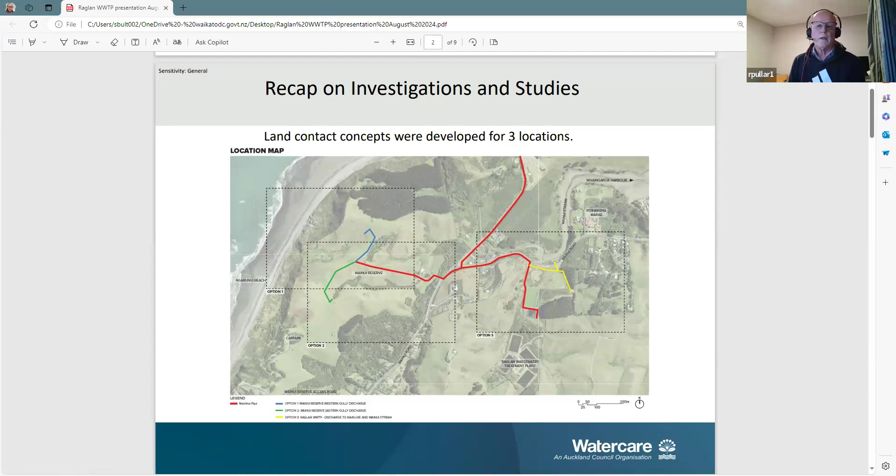We'll show you the preferred option shortly. We looked at another option which was reusing and creating a wetland within the plant area. That was option 3 down there where that yellow line is. So the preferred option, if we could go to the next slide, is option 1, and we've worked away on that, and this is the point where I hand over to Steph and she'll talk you through. Okay, Steph?

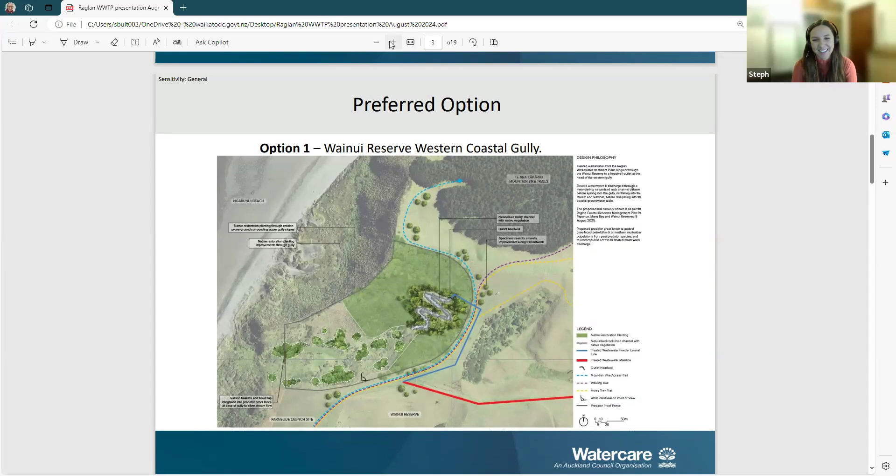Awesome, thanks Richard. So all options were taken through to Tainui with Angeline as the key rep there, and option 1 really came through in the feedback as the preferred option because it keeps any kind of discharge away from the Wainui stream. It provides that land contact as it goes through the naturalised rock channel, through the gully, and then eventually reaching the sand dunes and through to the groundwater of the marine environment. So if we just flick on to the next slide.

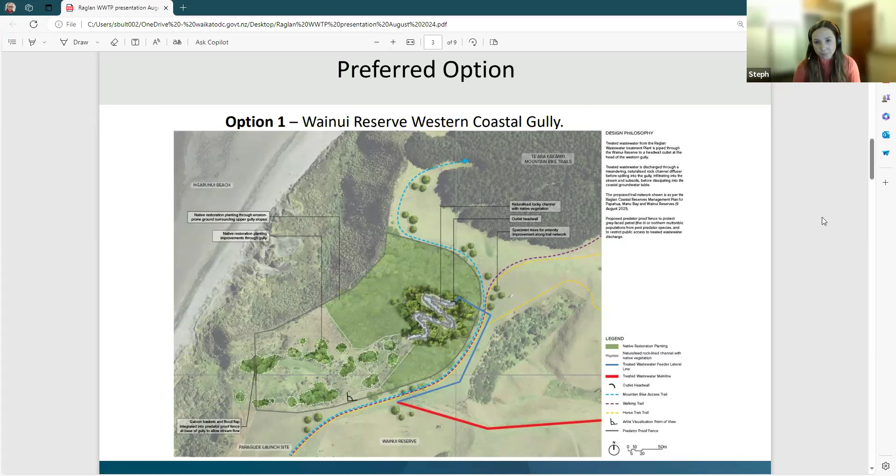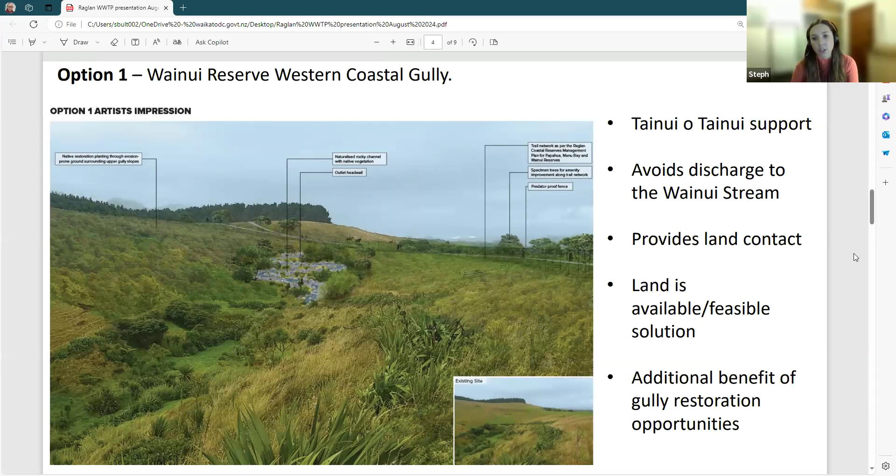Whilst none of the options that we've looked at are completely off the table, we have been focusing our energy on progressing option 1. Option 1 does have the support of Tainui. As I said, it avoids that discharge to the Wainui stream. It provides a long land contact, and it's feasible in the sense that the land is available. It's owned by Waikato District Council, and from a cost perspective, it's also feasible. We've run all 3 options through a cost estimate process.

We also think this site is really great for the opportunity to provide some restoration and enhancement of this whole gully area. Included in that cost estimate was about $1 million to regenerate the whole gully with native planting. So overall, it's looking like a really promising and feasible solution with some added benefits that we can incorporate as well.

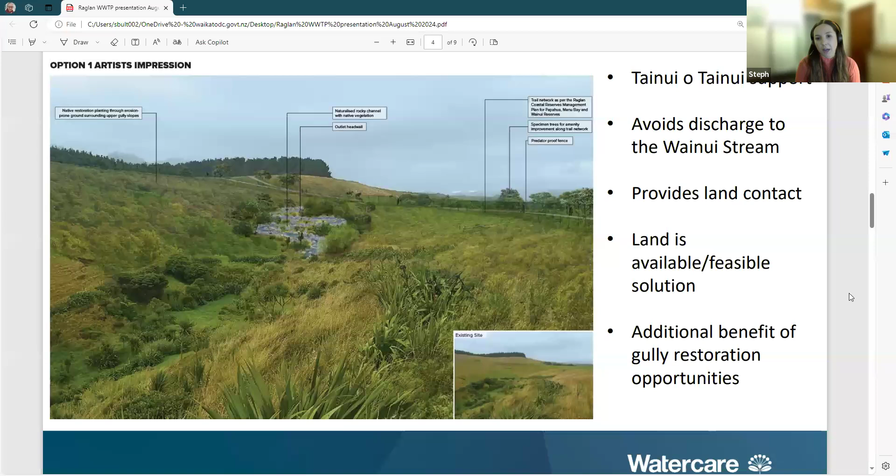So if we flick on to the next slide, one of the key things is working with our Waikato District Council Open Spaces team. So Steve Howard had previously done quite a lot of engagement with the Open Spaces team when they did look at SDI on the Wainui land.

So as a result of that previous engagement that Steve did, when they updated the Raglan Coastal Reserves Management Plan, it actually acknowledges that the Wainui Reserve may be used to look at for an alternative discharge solution for highly treated wastewater. So that's really helpful for us as a project in that there's been a warm up, it's been anticipated within the management plan, and this isn't a totally out of sequence option for it to happen at Wainui and at the reserve.

So we've taken the option 1 concept back to the open spaces team. So our main guy there is Glenn that we're dealing with. We talked him through the option and there was no major concerns or objections, and they're quite happy to work alongside our team as we progress through with design and our technical work. But of course, most importantly is that the reserves, we protect the recreational values and use of the reserve because that is its main purpose.

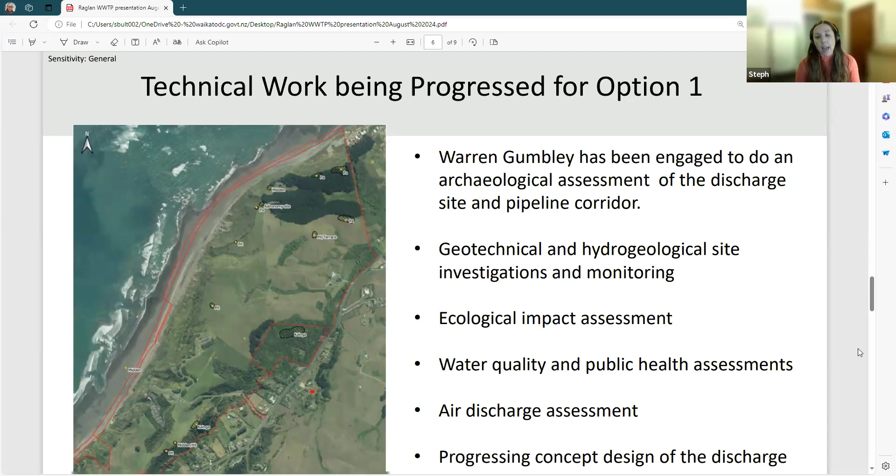Then if we flick on to the next slide, thank you. So we've got underway with engaging our technical assessments. So Warren Gumley has been engaged to do an archaeological assessment of the discharge site and also to look at the general corridor that we would need to do earthworks through Wainui to get the conveyance pipeline through. So Warren was recommended by Angeline as an archaeologist that's done a lot of work in this area already, and he actually did the assessment that fed into the updated coastal management plan. So he's really familiar with the sites. So Warren's heading out in the next couple of weeks to do an initial look over and make sure that in the general area there isn't anything that we need to progress further.

We're also getting our geotechnical and hydro work underway. So we're getting that done off the ranks first because we're looking at doing about 3 months of monitoring. So that's monitoring the groundwater within the area, just to see how the hydrology works through that discharge site. So we want to make sure that if we're sending water down there, that we're not going to get ponding and it's going to filter naturally, and that the site is going to be suitable.

We're also following that doing an ecological impact assessment, so that'll cover the gully but also the coastal marine area. Water quality and our public health assessments, air discharge. That's looking at the air discharge from the plant site itself, but also from the proposed discharge site. And then alongside our technical work, progressing with the concept design and then our ongoing engagement. So we do want to do quite soon a wider public engagement, so whether that's a drop-in session or something out in the community. Now that we have a solution and something that we're progressing with, we want to make sure that we're going out there and telling the story and getting some feedback.

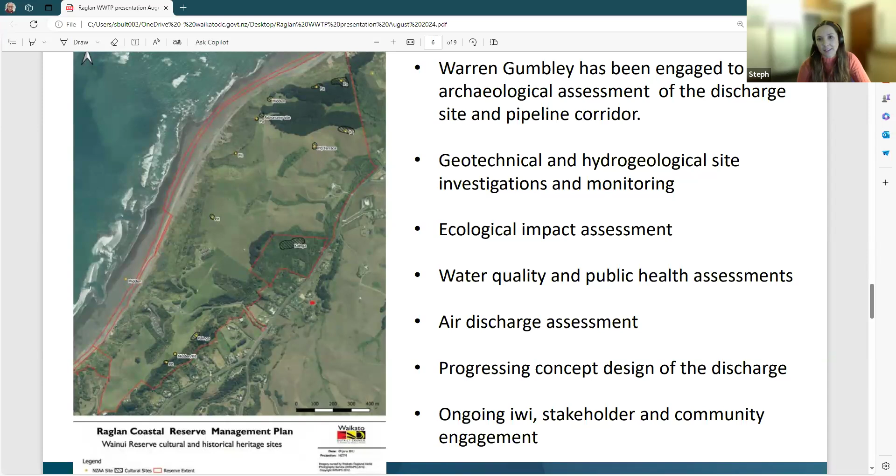Once we've secured those, then at a later date, we will come back and secure the consents that we need for the construction-related activities, for actually doing the construction side of the discharge and also the pipeline conveyance.

But Steph, just a question for you in terms of, so we've got these forums for public information. I note there's other interested members of the community who aren't on here today, but are fairly vocal in their views on what needs to occur within the area.

From a public notification perspective, are we planning to do something more within the community other than this, or are we relying on the regional council's process for public notification thereafter, as far as that consent is concerned? Yeah, no, so we're keen to do wider and more community engagement as part of this, so that ideally we're going to regional council with an application that can progress on a non-notified basis. Yeah, thank you. So we want to do that up front. Yeah. And that was what Steph mentioned at open day. We were open to council's input into what shape and form that would be, Keith.

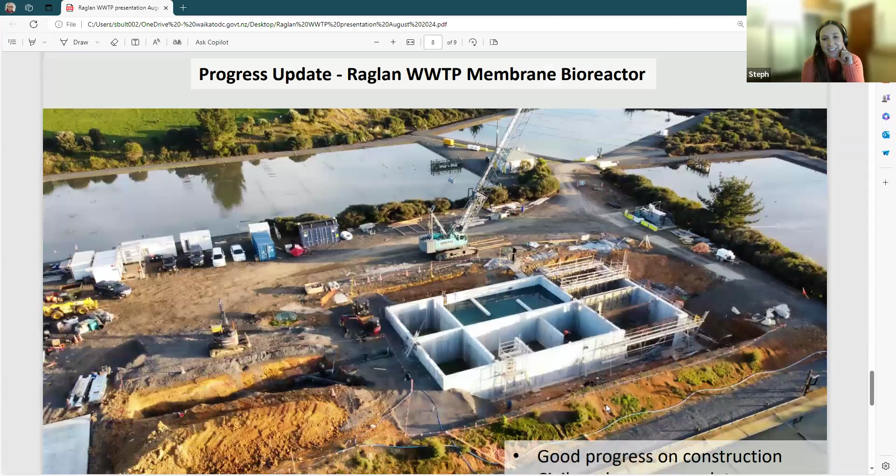Thank you. On the upside, though, I had a meeting with Peter Crabb yesterday and the guys down at the Raglan wastewater treatment plant. He seems pretty optimistic that things, if anything, are ahead of schedule. They've had good progress down there, so he's still signalling that things are good for 2025. Yeah, and if we keep scrolling down, we've got some updated photos of the plant. So it is looking...

Stephanie, before you carry on, the consents are for the land and for the CMA, which is the high water mark out to the sea. So does that mean the consent you're going for there is also the pipeline consent, the existing pipeline consent? No, sorry. So that's the discharge into the gully, because it eventually reaches the CMA through groundwater. We also need a coastal discharge permit.

So that's just a bit of a nuance there with the consenting rules under the coastal plan and the regional plan. Because there is a wetland right down the bottom of that gully, actually. Yes. So we'll also need consents under the NES for fresh water. So there's a bit of a bundle of activities. Angeline, the construction one we're talking about is the pumped line up through the park, up to the reserve. Yep, up to the reserve. So that'll need earthworks consents. Thank you.

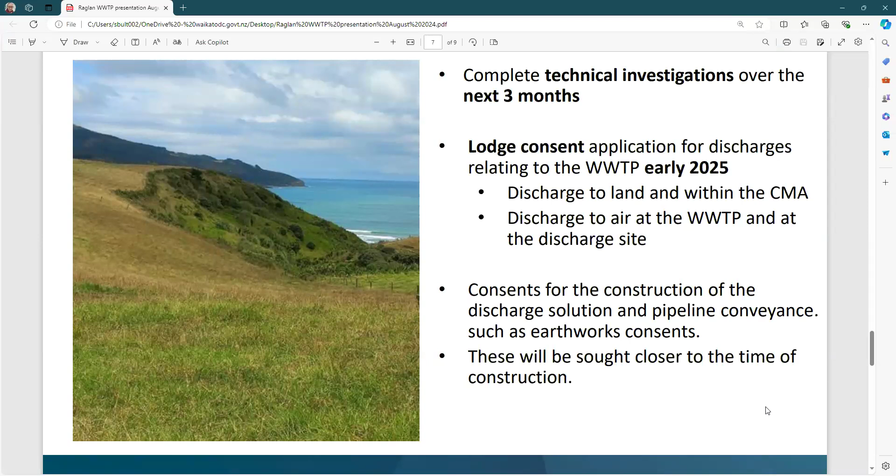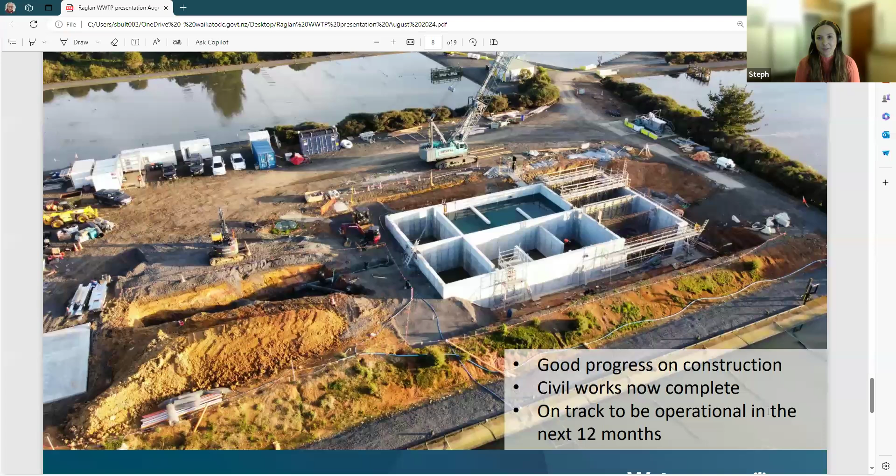Yeah, so Peter's update was good progression on the construction. They've now finished the civil works, and you can see the plant taking shape. Not my area of expertise, Richard, anything else to add, but I've seen the completed version of this in South Auckland. Apex have just recently finished both a water treatment plant and another MBR plant, almost identical to this. And I have to say, the quality is fantastic in terms of what they've delivered there. This is almost an identical sister to it. I do look forward to it being in operation.

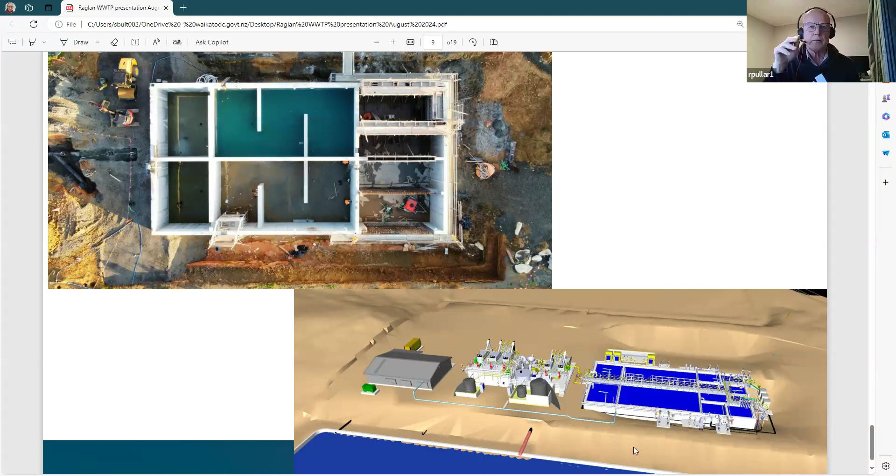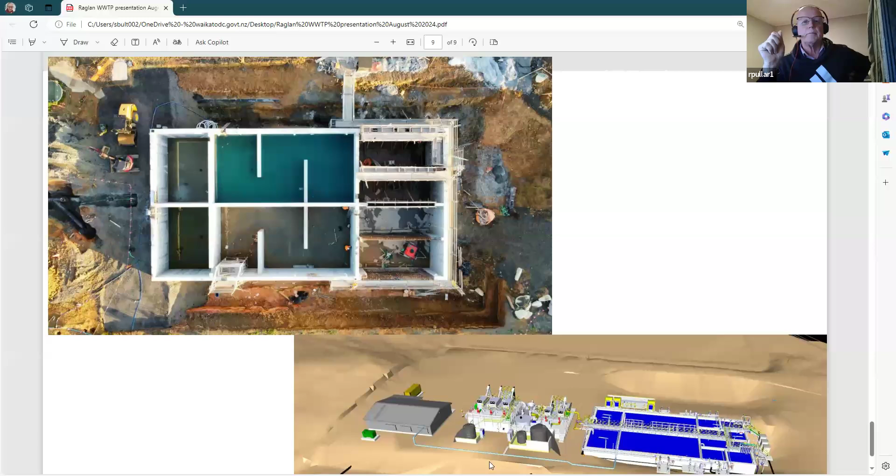Yeah, and as Ed and Steph mentioned, this wasn't meant to be finished till mid next year, whereas Pete's pretty confident he'll have it operating near Christmas time. But there'll be a significant period of commissioning and stuff. Christmas time 24? Yeah, this Christmas. Right. We'll just put 6 months. He reckons he's going to get it done in 12 months rather than 18.

Yeah. We'll just put that under our pillow for the moment, eh? Oh, he's been busy talking to Ed, hasn't he? You won't get much sleep with the stuff under your pillow, Keith.

Sorry, Steve. So that's our presentation, Keith. I don't know if we want to open things up. Yeah, definitely. I think we've had some questions on the way, but are there any other burning questions that anybody's got? John, we haven't heard from you this evening. It's kind of unusual. Have you got any thoughts in terms of the way things are progressing?

Well, my only thought is that there's supposedly a coastal reserves consultation group, which the council formed after it closed down the regular meetings. So I think that's overdue for a meeting. So maybe it would be appropriate to talk to them as part of the consultation that Stephanie was talking about. Yeah, definitely. Yep, absolutely.